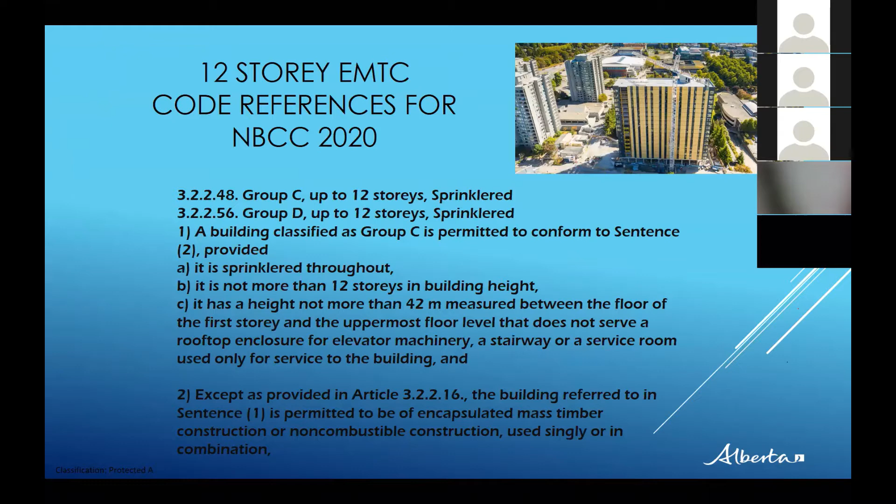These are the code provisions intended to be in the 2020 National Building Code of Canada: of course sprinklered, height not more than 42 meters, measured between the floor of the first story and the uppermost floor level, and it does not serve a rooftop enclosure for elevator machinery, stairway, or service room — only for servicing the building.

The building referred to is permitted to be of encapsulated mass timber construction or non-combustible construction, used singly or in combination. That would be the hybrid construction, where they typically do the podium or a number of floors at the base with non-combustible construction, and then go with encapsulated mass timber from there on.

Now, the current requirement is non-combustible construction — the degree of fire safety attained by the use of non-combustible materials for structural members and other building assemblies. Combustible construction means that type of construction that does not meet the requirement for non-combustible construction.

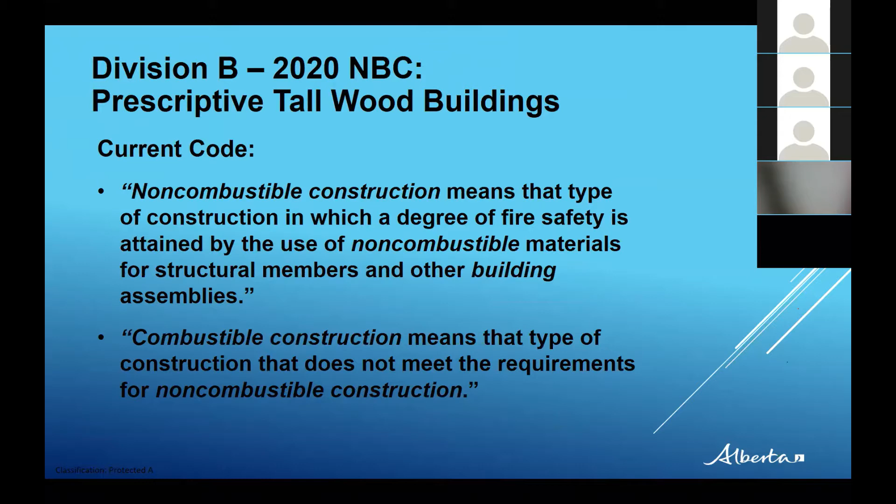Non-combustible construction and combustible construction, as defined terms, they're convenient, although not necessarily accurate categorized labels. Could just as easily say this type of construction is X, and the other type is everything that's not X. That's pretty broad, and it leaves room for other definitions or other types of construction now that there is more advanced technology to address that.

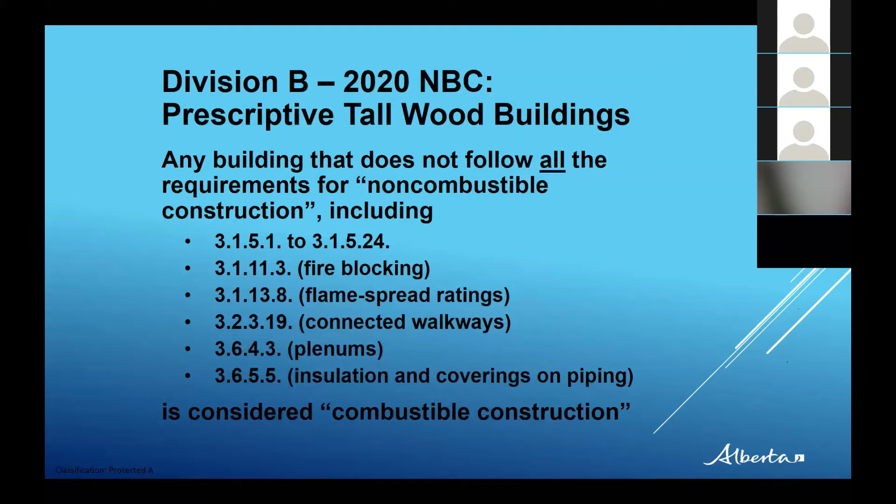Again, in the NBC, any building that does not follow all the requirements for non-combustible construction, including 3.1.5.1 to 3.1.5.24, which includes fire blocking, flame spread ratings, connected walkways, plenums, insulation, and coverings on piping, is considered combustible construction if it does not comply with any of those.

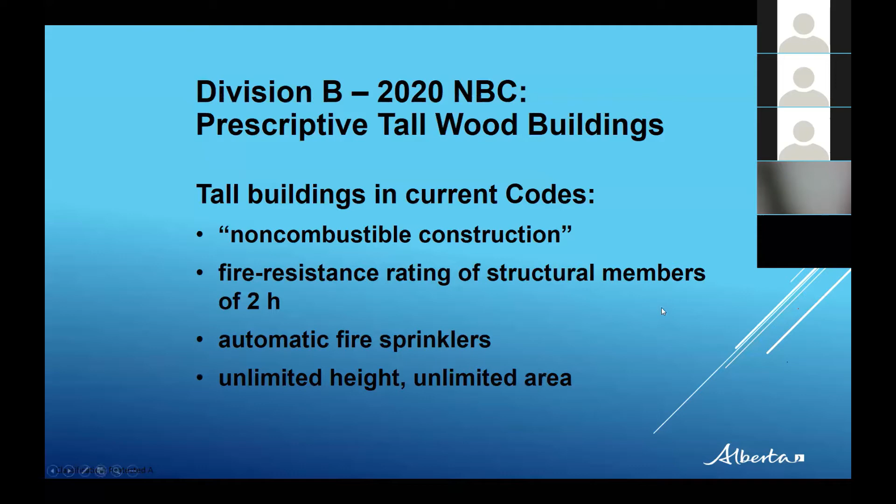Okay, tall buildings in current codes are required to be non-combustible construction. There would be a required fire resistance rating of structural members of 2 hours. They require automatic fire sprinklers under NFPA 13, and that's currently unlimited height and unlimited area. That's considered to provide an acceptable level of safety.

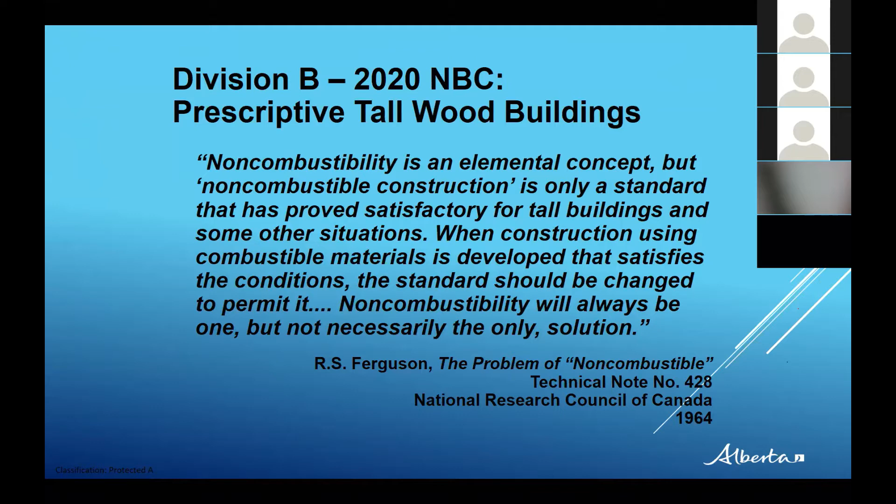However, for the 2020 NBC, under prescriptive tall wood buildings, non-combustibility is an elemental concept, but non-combustible construction is only a standard that has proved satisfactory for tall buildings and some other situations. When construction using combustible materials is developed that satisfies the conditions, the standard should be changed to permit it. Non-combustibility will always be one, but not necessarily the only solution.

And this is from the notes of Mr. Ferguson from the NRC, in the technical notes, and that was back in 1964. So it was recognized that maybe there's something else, but at the time that solution wasn't available, and this is where we are now.

Under tall wood buildings, the general premise was to develop a set of provisions that achieves the current level of fire safety when wood structural elements are substituted for structural elements of non-combustible material.

This again is where we come to the mass timber construction, with the concerns and issues brought up by the sub-council or sub-task groups that must be addressed to provide that approximately equivalent level of safety, or it's an alternative solution for us under the standards, but that is going to be in the 2020 National Building Code of Canada.

So again, non-combustible construction, then there's structural elements required to be of non-combustible materials replaced with wood elements. So that would be the mass timber elements, and then what additional requirements are needed to address the situation so that the acceptable level of safety is maintained in a building built with mass timber.

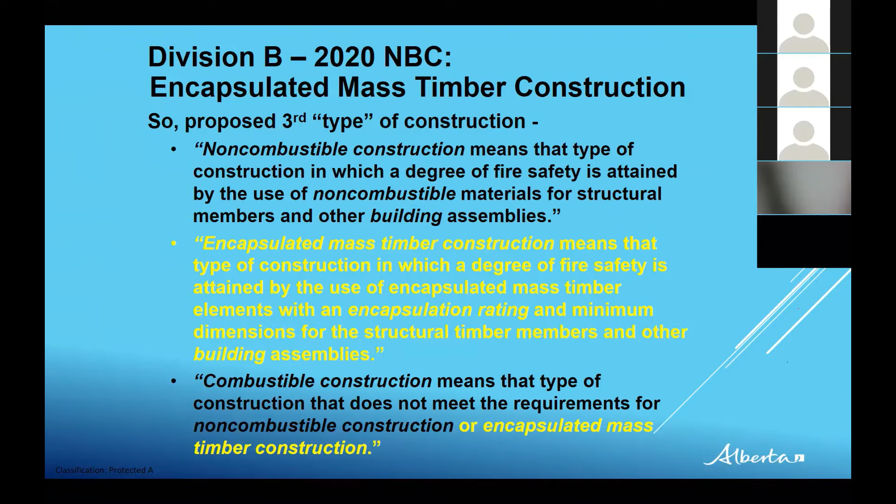Now, the third type of construction, encapsulated mass timber construction, means that type of construction in which a degree of fire safety is attained by the use of encapsulated mass timber elements with an encapsulation rating and minimum dimensions for structural timber members and other building assemblies.

So that revises the definition of combustible construction, meaning that type of construction that does not meet the requirements for non-combustible construction or encapsulated mass timber construction. So that is the third type, which we are working with, encapsulated mass timber construction. Typically, I'll refer to that as EMTC as I move along.

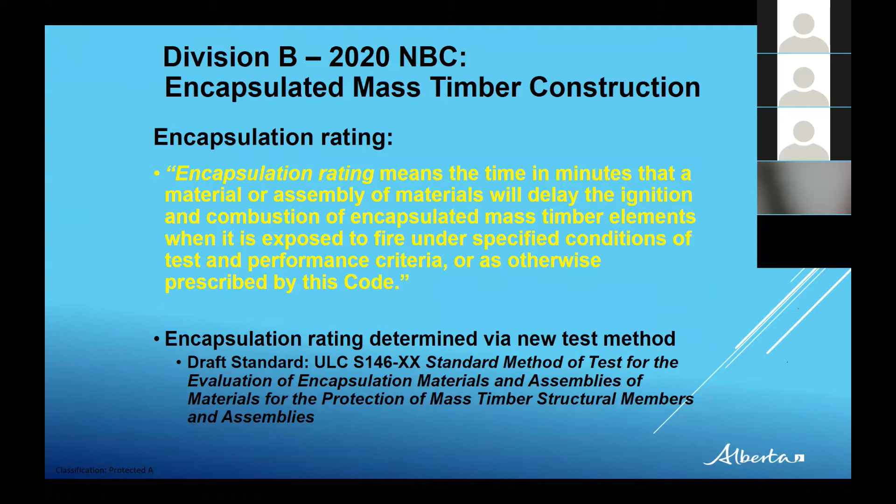And encapsulated mass timber construction has an encapsulation rating, and that's a new defined term as well. Encapsulation rating means the time in minutes that a material or assembly of materials will delay the ignition and combustion of encapsulated mass timber elements when it is exposed to fire under specified conditions of test and performance criteria, or as otherwise prescribed by this code.

An encapsulation rating is determined via the new test method of the draft standard ULC S146, standard method of test for the evaluation of encapsulation materials and assemblies of materials for the protection of mass timber structural members and assemblies. And this encapsulation rating, of course, would have to meet the minimum 2-hour standard as currently required for non-combustible construction.

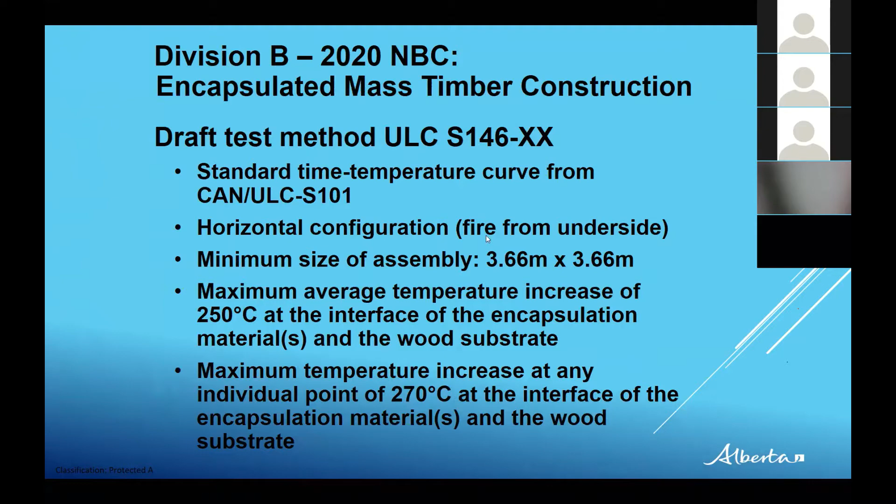The draft test method for EMTC uses the standard time temperature curve from CAN ULC S101, horizontal configuration, fire from underside, so that's tested from typically under the floor. Minimum size of assembly to be tested is 3.66 meters by 3.66 meters.

The maximum average temperature increase of 250 degrees C at the interface of the encapsulation materials and wood substrate. The maximum temperature increase at any individual point is 270 degrees C at the interface of the encapsulation materials and the wood substrate.

Now that is what was proposed and has already gone through, and is going to be in the National Building Code of Canada 2020. But initially it had been anticipated that the next edition of the Model National Codes would be available in 2020, typically in November or December of this year.

Codes Canada has announced that the publication date has been updated for the national model codes and has been extended. The next editions are anticipated to be available in December 2021, including the National Building Code of Canada, the National Fire Code, the National Energy Code for Buildings, and the National Plumbing Code of Canada. All anticipated to be available together in December 2021, which would avoid anything showing up in the middle of the construction season.

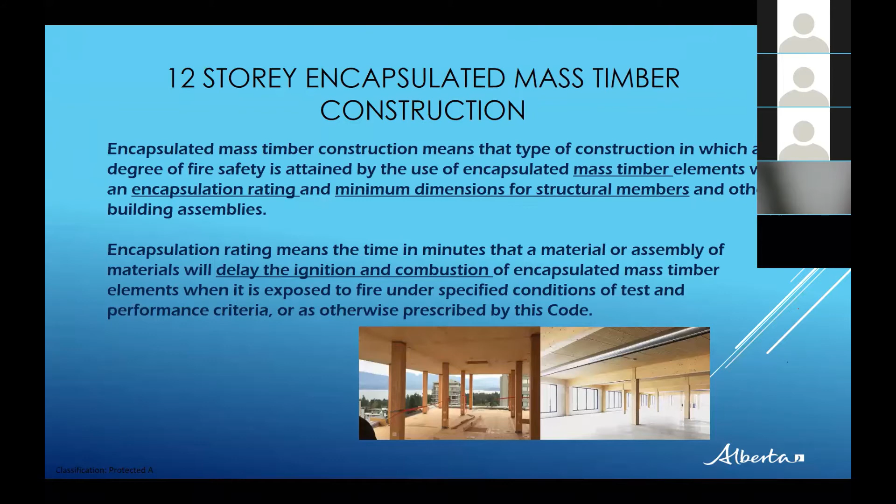As you can see from this slide, this is the exposed mass timber while it's under construction. In the second picture, there's still exposed mass timber at the ceiling levels, but they have the concrete flooring installed - concrete or gypcrete of 1.5 inch thickness - installed on top of the mass timber flooring. So that's partially encapsulated at this time, and that's how they're attaining the fire protection ratings.

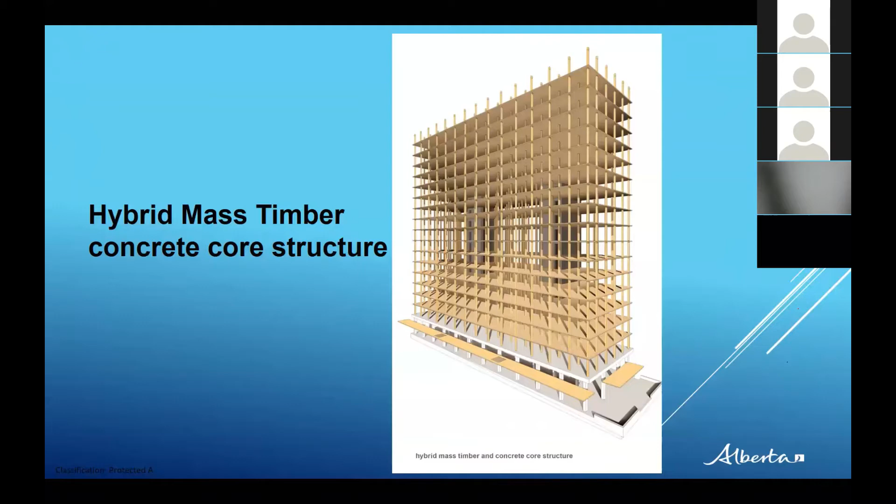Okay, the hybrid mass timber concrete core construction. As mentioned, this is the hybrid mass timber core from the 18-story UBC Tallwood House building, and they've built the podium, as you can see down here. That is a concrete podium, and if you look through here, the two cores are concrete cores that contain the elevator shafts and the exit stairwells for the building.

That is just showing the exposed mass timber. It would not be up like in this manner under construction.

Okay, and under the mass timber structure, they do have steel connectors that join all the floors together and the columns as well - that's where the floor assemblies connect into those structures. And the partial encapsulation - this is the CLT floor slabs here, and glulam columns and steel connectors.

Then during construction, they must do partial encapsulation. So that's where they would do the floor with the concrete on top, and just under here - you can barely see it - with one layer of drywall to do the partial encapsulation.

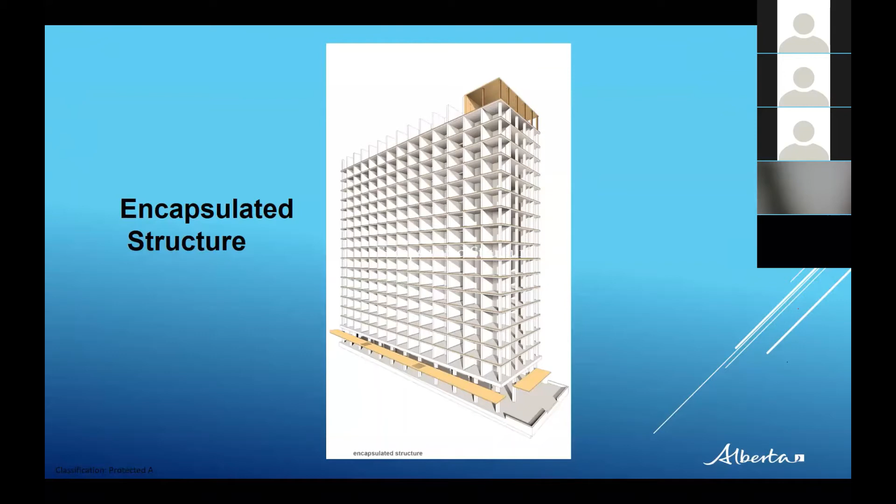So under this same Tallwood House drawing, they do show the completed structure as fully encapsulated, so you would see minimal exposed mass timber elements within the building. That was the other thought - was it fully exposed mass timber throughout the whole building? That was another concern initially brought forward to us, when at the time we identified that everything would be encapsulated.

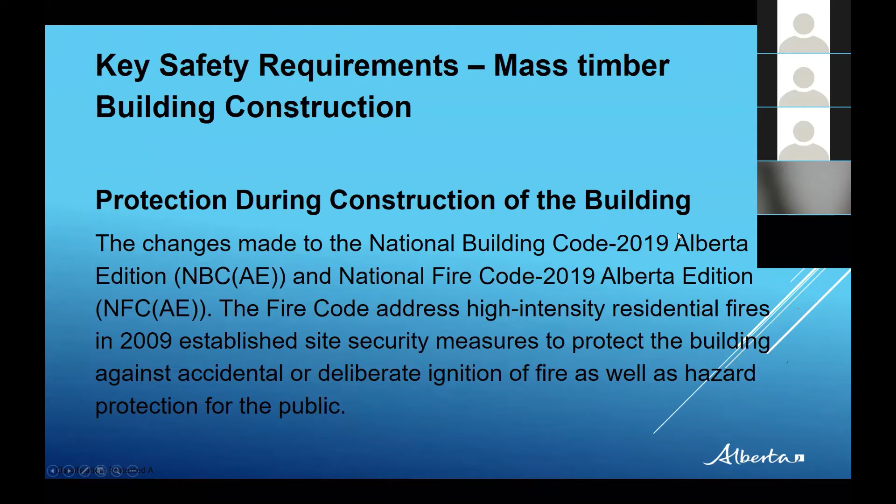Now, the key safety requirements for mass timber building construction. One of the big issues is protection during construction of the building, again brought forward to our attention by the fire services. The changes made to National Building Code 2019 Alberta Edition and the National Fire Code 2019 Alberta Edition - the fire code addressed high-intensity residential fires in 2009, established fire site security measures to protect the building against accidental or deliberate ignition of fire, as well as hazard protection to the public. This carries over into the 2019 editions of the fire code, and this criteria is highlighted within the STANDATA for EMTC.

The national standards for mass timber buildings of up to 12 stories maintain protection during construction of the building, and establish even better protection standards while the building is under construction. The building may only be occupied once fire safety features are fully enabled.

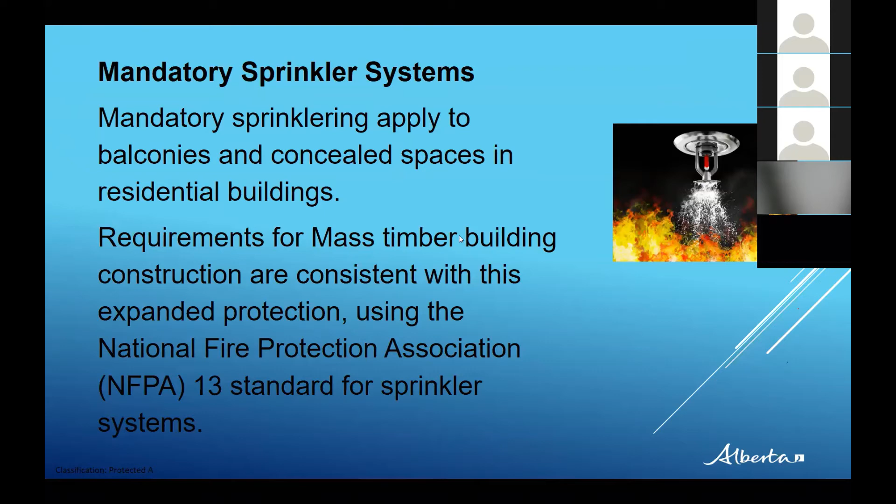Of course, there are mandatory sprinkler systems required, applying to balconies and concealed spaces in residential buildings. Requirements for mass timber building construction are consistent with this expanded protection, using the National Fire Protection Association, or NFPA 13 standard for sprinkler systems. It would not even relate to the NFPA 13R, which is only for buildings up to 4 stories, residential construction.

Of course, there's a fire rating of roof coverings to prevent fire growth and the spread of fire across the roof covering, which could lead to the spread of fire to occupied parts of the building. Class A roofing is required, and that's within the code, but it's specific as well to identify that that's required for the EMTC building.

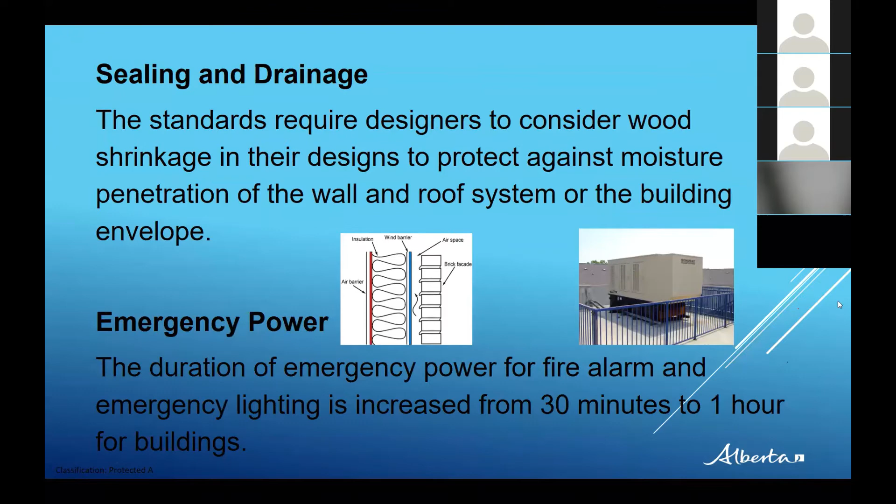The sealing and drainage - the standards require designers to consider wood shrinkage in their designs to protect against moisture penetration of the wall and roof system of the building envelope. This is inherent in wood construction - there is going to be a certain amount of shrinkage, and that has to be addressed in the design.

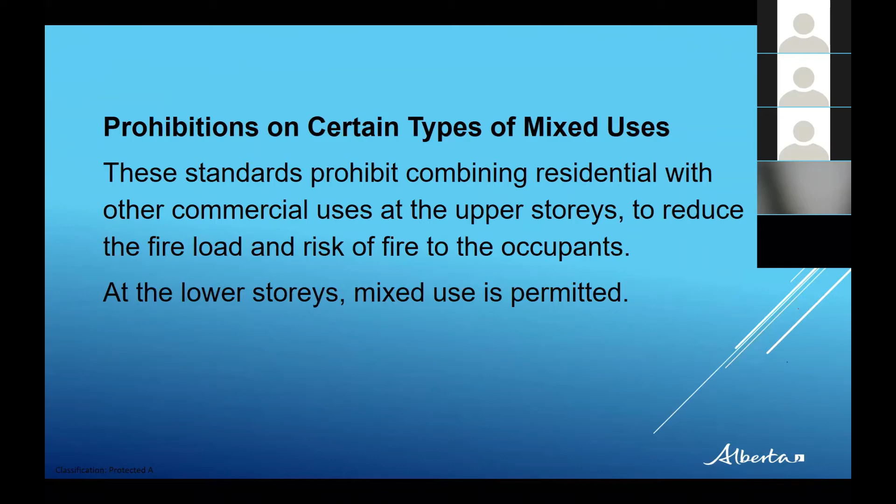Emergency power - duration of emergency power for fire alarm and emergency lighting is increased from 30 minutes, which is typical, to 1 hour for buildings under EMTC. That is over and above what's typically required in a typical non-combustible construction or another type of 12-story building.

Prohibitions of certain types of mixed uses. These standards prohibit combining residential with other commercial uses at the upper stories to reduce the fire load and risk of fire to occupants. At the lower stories, mixed use is permitted.

The strength of modern mass timber versus concrete - despite being 5 times lighter than concrete, cross-laminated timber, or CLT, has a comparable strength-per-weight ratio to concrete, as a multi-layer wooden panel spanning in 2 directions. Each layer is placed crosswise to the adjacent layers to increase its stability and strength. Buildings using mass timber carry the same strength as concrete.

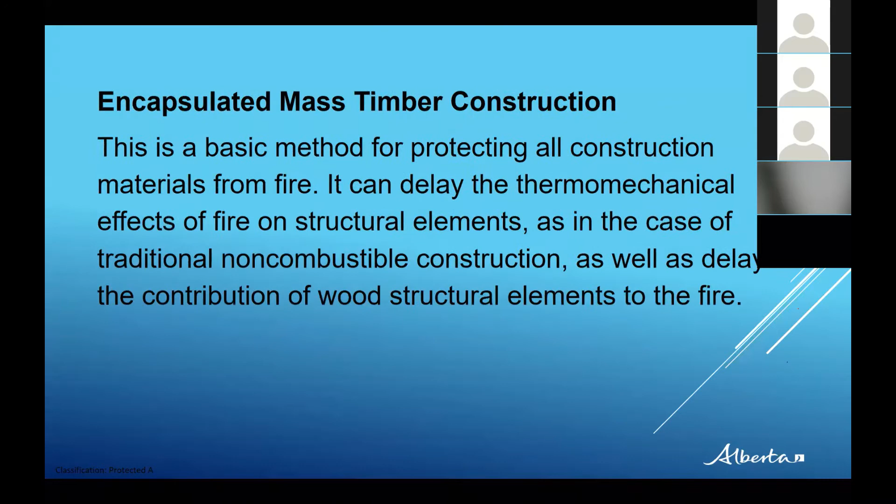This strength also enables mass timber buildings to commonly outperform other systems in terms of cost and life safety in earthquake zones. As you can see, the timber strands, or the mass timber, have one layer going in one direction, and then the next layer crosses in the other direction. That's how they're attaining their strength, using certified or acceptable adhesives.

For EMTC, this is a basic method for protecting all construction materials from fire. It can delay the thermomechanical effects of fire on structural elements, as in the case of traditional non-combustible construction, as well as delay the contribution of wood structural elements to the fire. That again is the encapsulation rating.

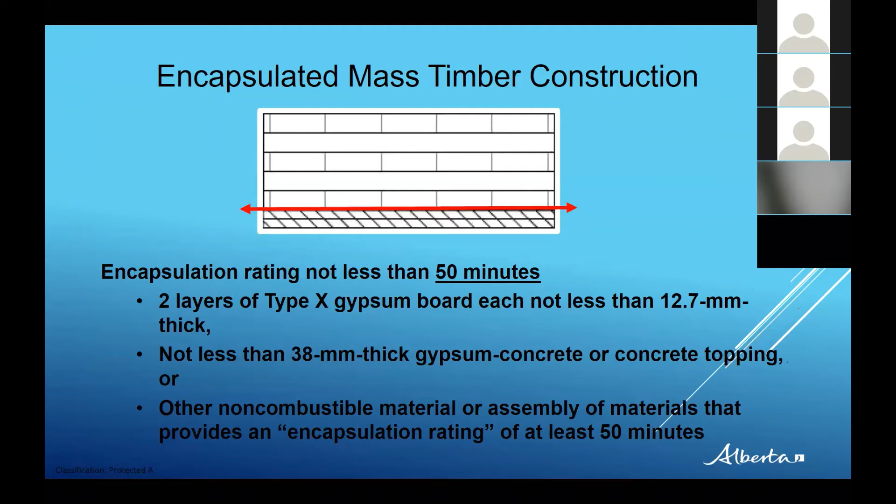For the encapsulation rating, not less than 50 minutes over and above the rating of the mass timber itself - 2 layers of type X gypsum board, each not less than 12.7 millimeters thick; not less than 38 millimeter thick gypsum concrete or concrete topping; or other non-combustible assembly materials that provide an encapsulation rating of at least 50 minutes. That is the additional requirement over and above the structural member itself.

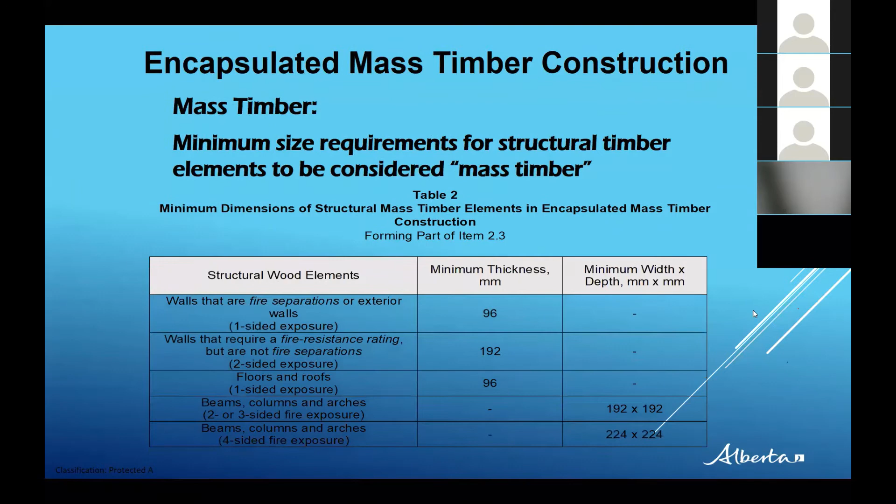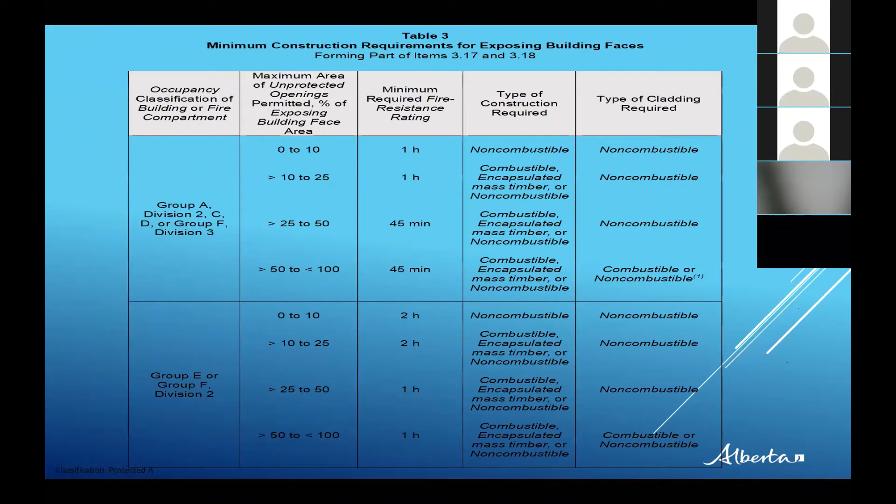There's a table for the minimum size requirements for structural timber elements to be considered mass timber, included within the standard data. These have been developed to provide assurance that the timber elements will exhibit the fire performance characteristics of mass timber rather than lightweight small dimensional wood elements. This means that after charring, the timber elements will still be thermally thick for the required fire resistance rating.

Table 2, or table 3, includes the minimum construction requirements for exposing building face, included in the standard data.

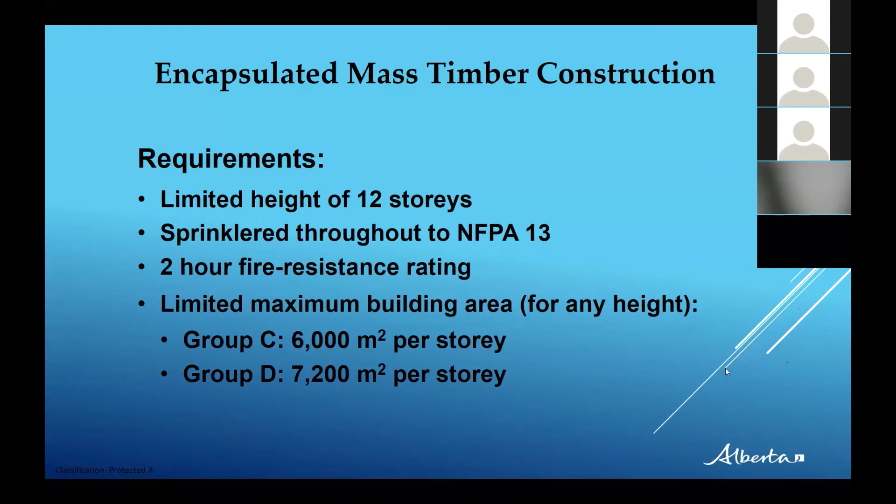EMTC construction is limited to a height of 12 stories, sprinklered throughout to NFPA 13, with a minimum 2-hour fire resistance rating, and limited maximum building area for any height. Group C is 6,000 square meters per story, and Group D is 7,200 square meters per story.

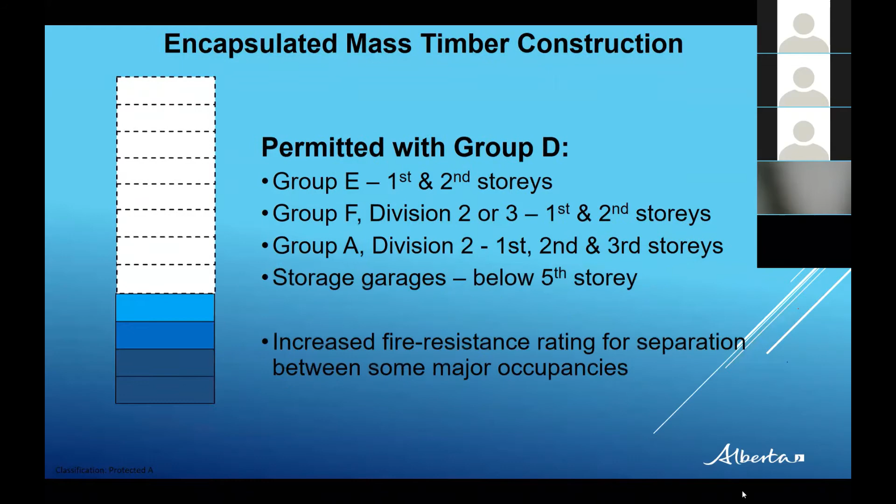So it's permitted in all stories for Group C or Group D, up to 12 stories. Group E can be permitted on the first and second stories. Group A Division 2 on the first, second, and third stories. Storage garage can be built below the 5th story. There's increased fire resistance rating required for separation between some major occupancies.

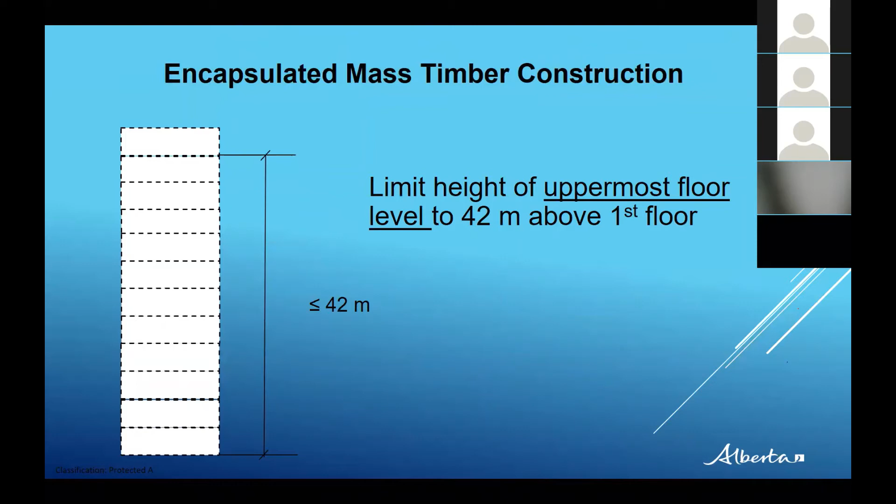Permitted with Group D, Group E on first and second stories again. Group F Division 2 or 3 on the first and second stories. Group A Division 2 on first, second, and third stories. Again, storage garages below the 5th story, and increased fire resistance rating for separation between some major occupancies.

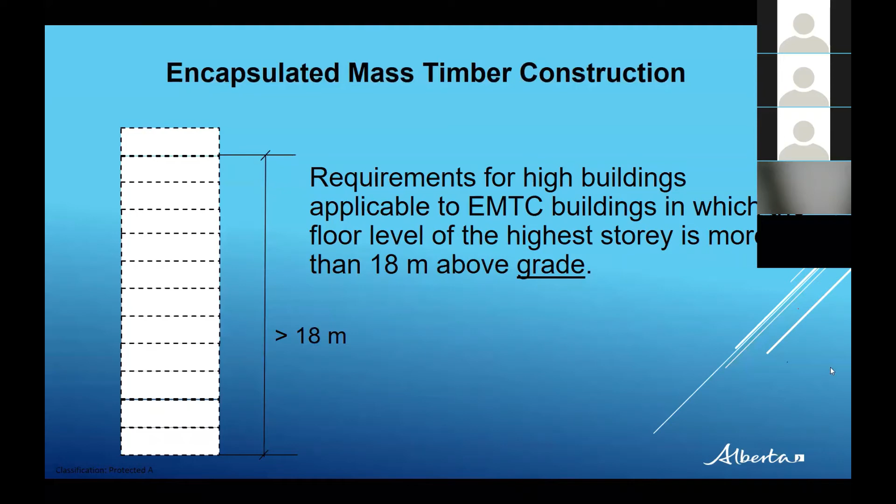Encapsulated mass timber construction limits the height of the uppermost floor level to 42 meters above the first floor level—so that's the first floor to the floor of the uppermost story being 42 meters or less. As indicated, the STANDATA has to be used in conjunction with the building code, and the requirements for high buildings apply to EMTC buildings where the floor level of the highest story is more than 18 meters above grade. Once that's in effect, high building criteria come into play.

What are the additional mass timber requirements? The materials permitted shall conform to subsection 3.1.5 for these EMTC requirements: combustible roofing materials, combustible window sashes and frames, exterior cladding, combustible components in exterior walls. This indicates the limits on those elements, including nailing elements, combustible flooring elements, combustible stairs, combustible interior finishes, combustible elements in partitions, and concealed spaces. So it's not saying you can use combustible stairs anywhere, but it does provide for using them in certain locations.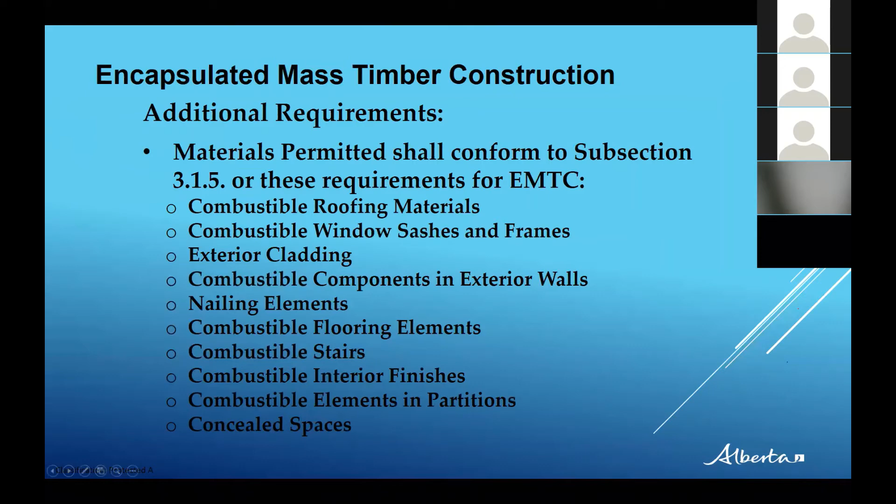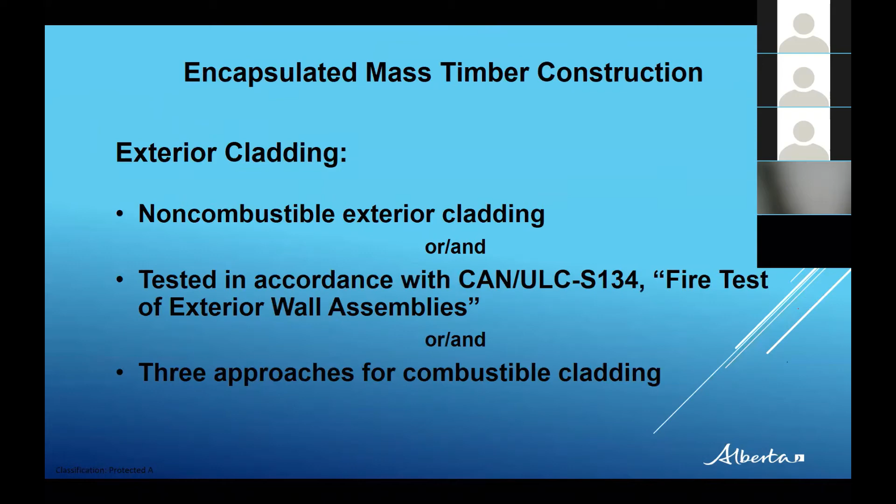The floor system for a raised platform, for example in item 2.9 of the STANDATA, is permitted to include combustible subfloor and combustible finished flooring, on top of the encapsulated mass timber flooring. Wood stairs are permitted in a suite but need to conform to items 2.2 to 2.7 and 2.9 to 2.12 of the STANDATA—so combustible stairs within a suite, for those with two-story suites in a high-rise, I guess.

Exterior cladding must be non-combustible and/or tested in accordance with CAN ULC S134 fire test of exterior wall assemblies, and there are three approaches for permitted combustible cladding. Approach 1 represents not more than 10% of each story, not contiguous over more than 4 stories, not more than 1.2 meters in width, separated from other portions of the same story by 1.2 meters, separated from adjacent stories by 2.4 meters, and a flame spread rating of not more than 75.

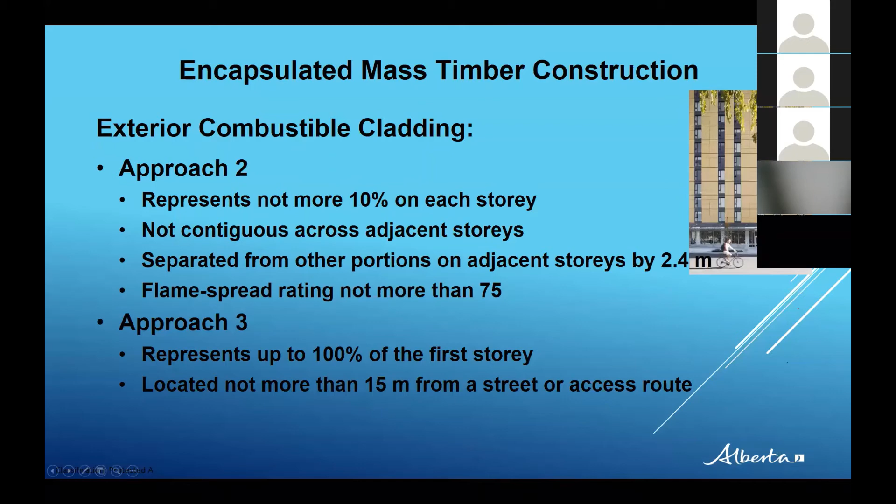Exterior combustible cladding approach 2 represents not more than 10% on each story—excuse me, I think I provided a picture that may indicate more than that. That is a UBC building, but the requirement is a flame spread rating not more than 75, and under that approach there are special requirements, so don't mind that picture I included. Again, it's separated from other portions of adjacent stories by 2.4 meters, not contiguous across adjacent stories.

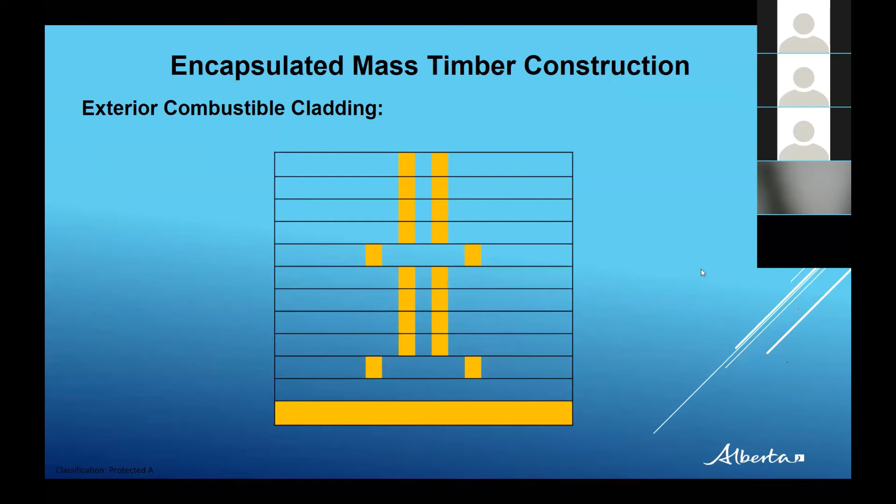Approach 3 represents up to 100% of the first story, not located more than 15 meters from a street or access route. So that may look something like this for exterior combustible cladding—for a typical 12-story EMTC, you would end up with not that much combustible cladding. Another scenario could look like this for exterior combustible cladding, though like I said, that picture I had was a little misleading, as it's not for a 12-story EMTC.

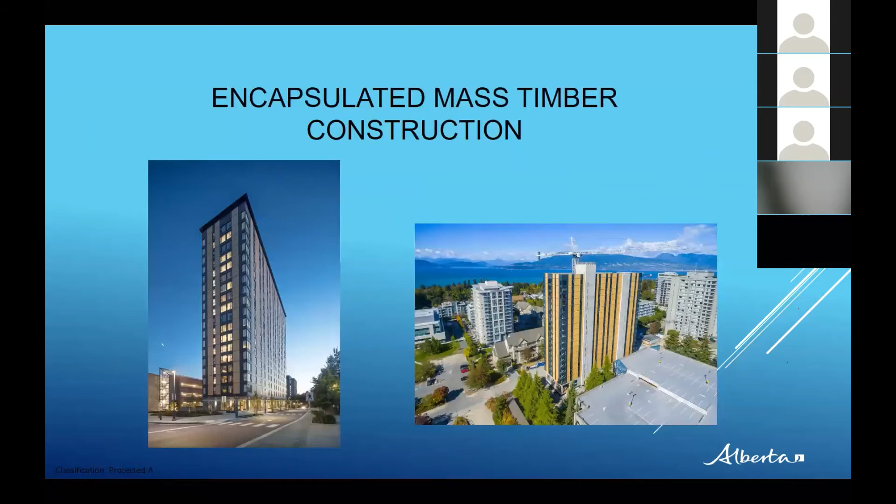Encapsulated mass timber construction. Again, what I am using is the 18-story tall wood building that I had permission to use these pictures. I didn't want to get copyright protection issues with using someone else's pictures, so these ones I had permission to use. So that would be the building again at UBC, University of British Columbia, and this is part of the process they were going through for the encapsulated mass timber construction.

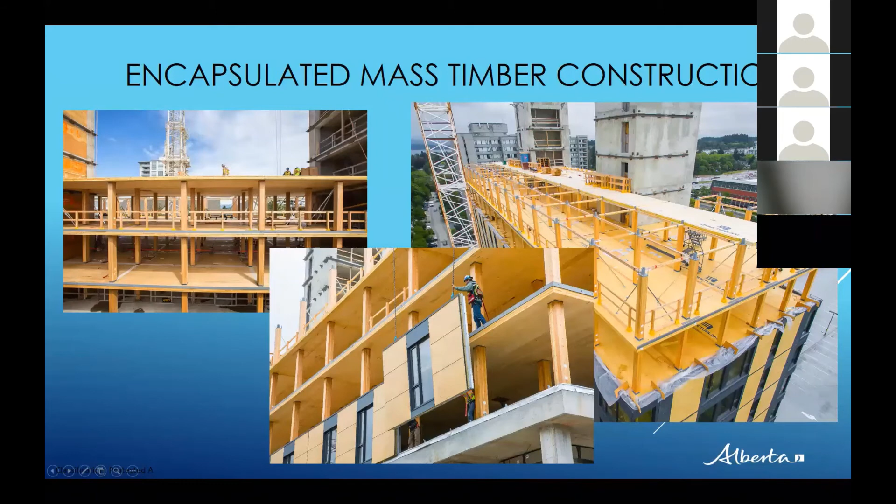As you can see, they're doing the wall panels prefabricated offsite. This initially, that's the podium that they're working on. You can see these steel wraps around here, that is forming the basis for the encapsulated flooring, with the concrete or gypsum going on top of the wood structure. Again, there's a side picture here, but as you can see, the panels are going in. These are full-size panels, all prefabricated off-site.

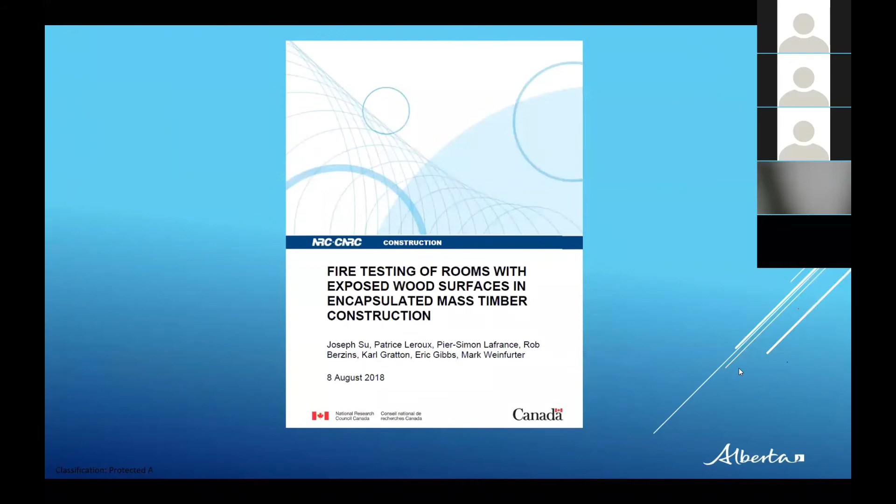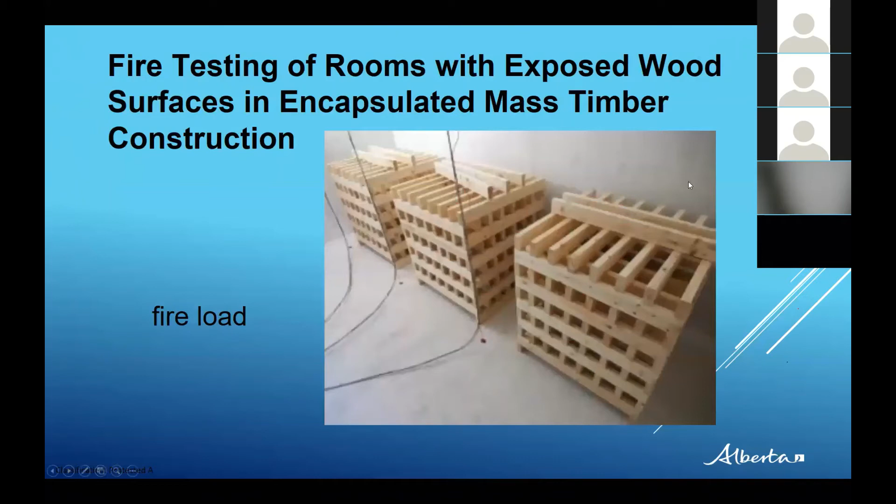They did some fire tests of rooms with exposed wood surfaces in encapsulated mass timber construction. That was done by the National Research Council. Their fire test room setup had a big furnace and hood, and basically they took raw exposed mass timber to do their fire testing. The fire tests included wood cribbing for the fire load, and the fire load is the average residential fire load density of 550 megajoules per square meter. So that's still a pretty good fire load.

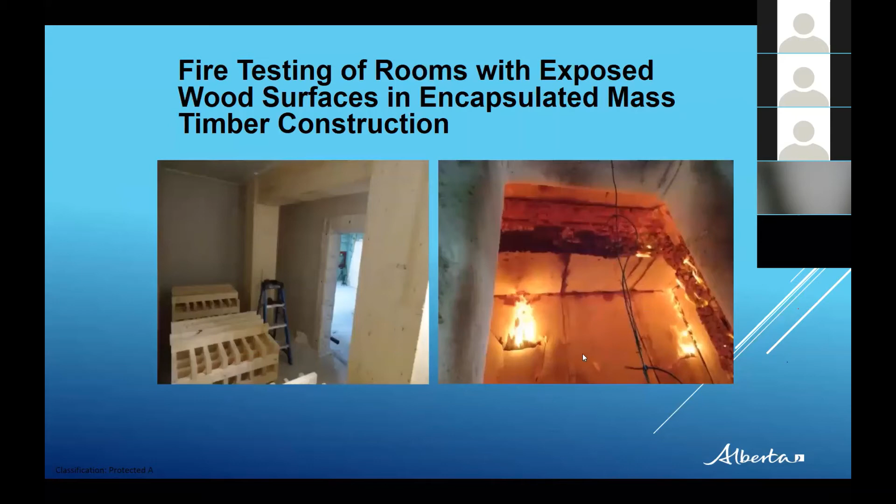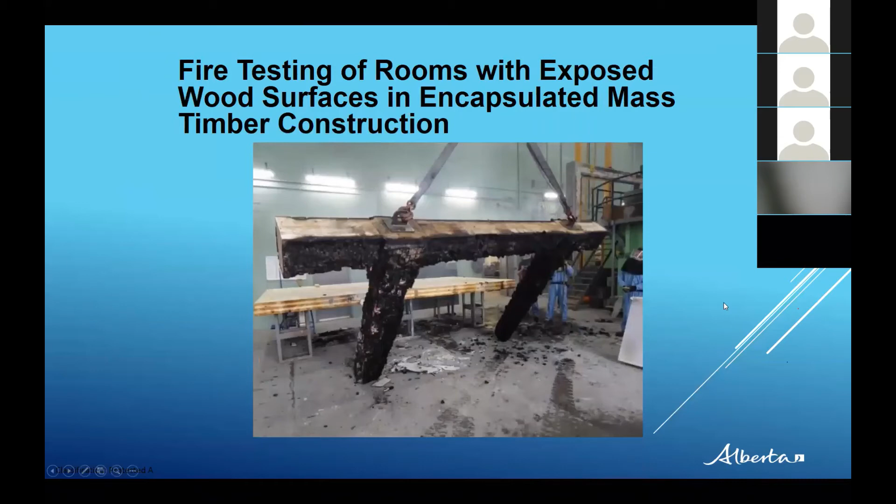And then they did the fire test and set it on fire. Basically you could see the exposed mass timber, and then they did the criteria where they encapsulated a portion of the ceiling assembly and the wall assembly. So there's some more fire tests, and basically here they show the columns, exposed columns and beam, and then the rest of the room was covered with a layer of gypsum. Again, they set that on fire to see what happens.

And here's the exposed column and beam after it was burnt up. As you can see from here on one side, there's still some structural integrity within the exposed beam. And then from the column, it's charred, but there's still a certain amount of mass left within the column. Again, here's the end view - you can see the exposed beam, the structural integrity is there. And that charring, once it's charred, is providing a protective layer around the mass timber.

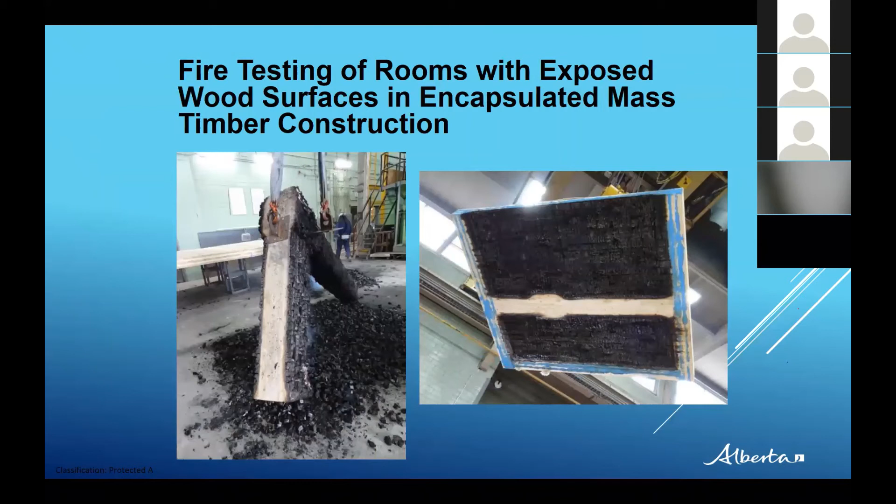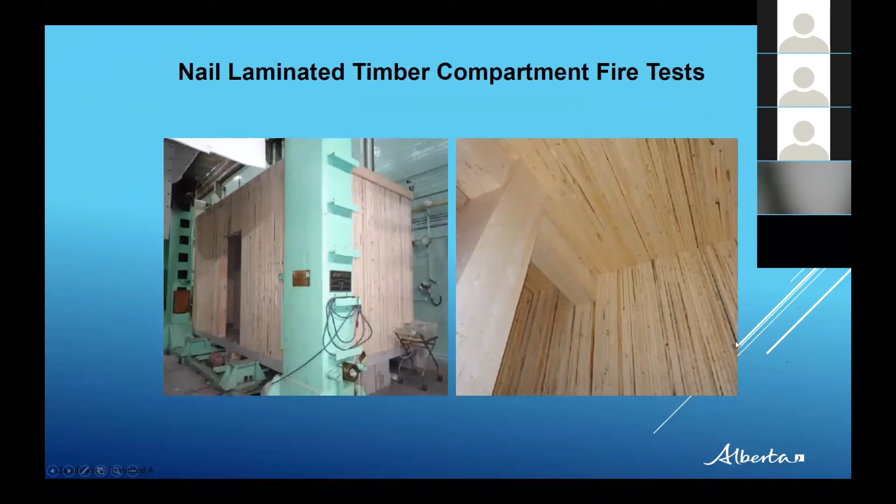And here you can see where the drywall is burnt off, and here's where that beam was holding up. So that still has some charring here, and the structural integrity is still there for their design. Just some more fire tests, again showing the charring that forms - it becomes a sacrificial layer of the wood. Once it's charred, then it maintains the integrity after that initial char. And just some more pictures of fire testing - they did burn those rooms up pretty good.

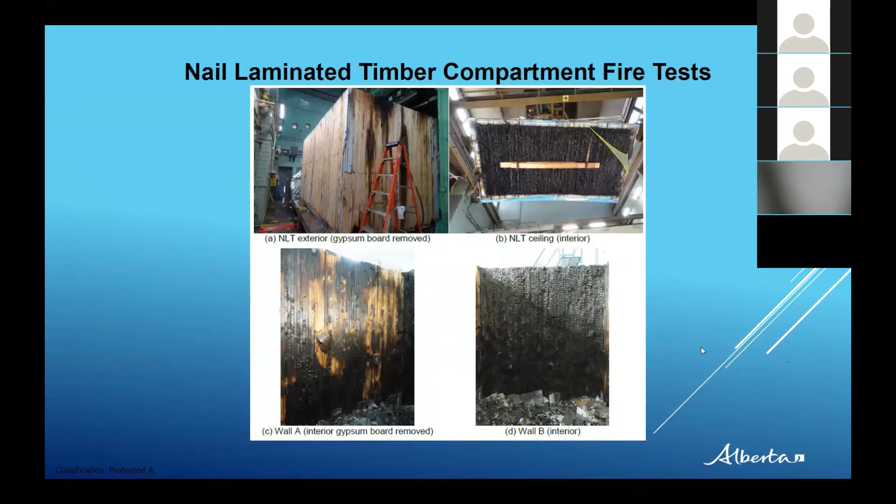We'll go through this pretty quick. Nail laminated compartment fire tests - they did the same thing with nail laminated testing. So this is not CLT, it's nailed and laminated pieces of lumber. Again, they built a compartment and burnt it up, with the same average fire load. And initial tests, they're showing the tests of the nail laminated system. Initial tests did not work out so good, but they had different adhesives that they used later on.

And this is a test after 2 hours of burning. So just to show you that it does char, but the initial mass timber holds up in place.

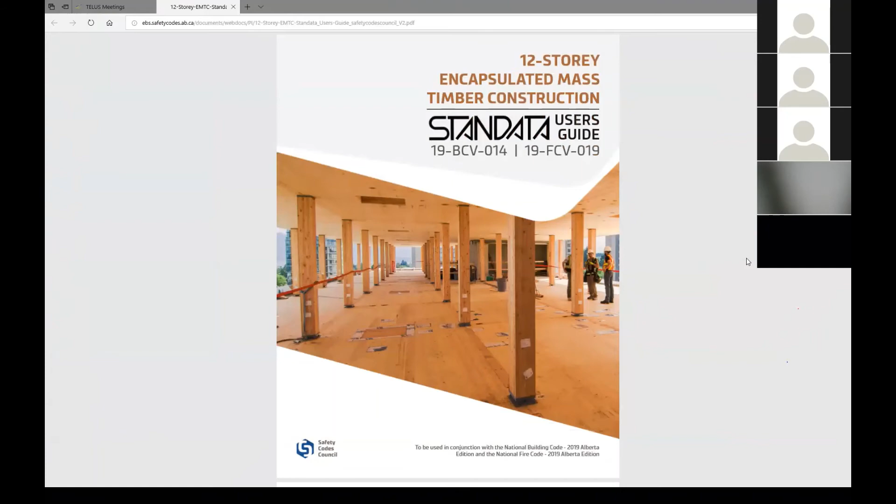Now the EMTC standata user's guide - that was just developed to assist, basically providing the applicable code references from the standata have been included in this user's guide. And I did forget to include that basically within that standata user's guide, the portions of the standata with the code references are all hyperlinked. So we could open this up, I believe.

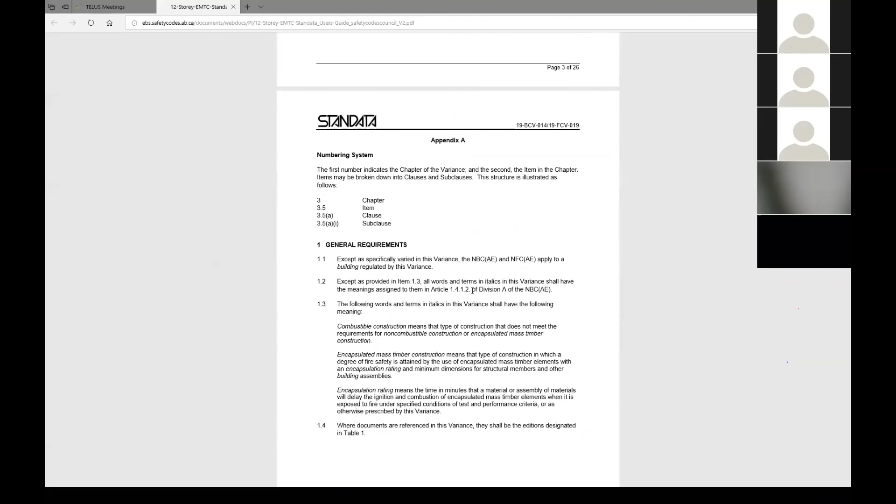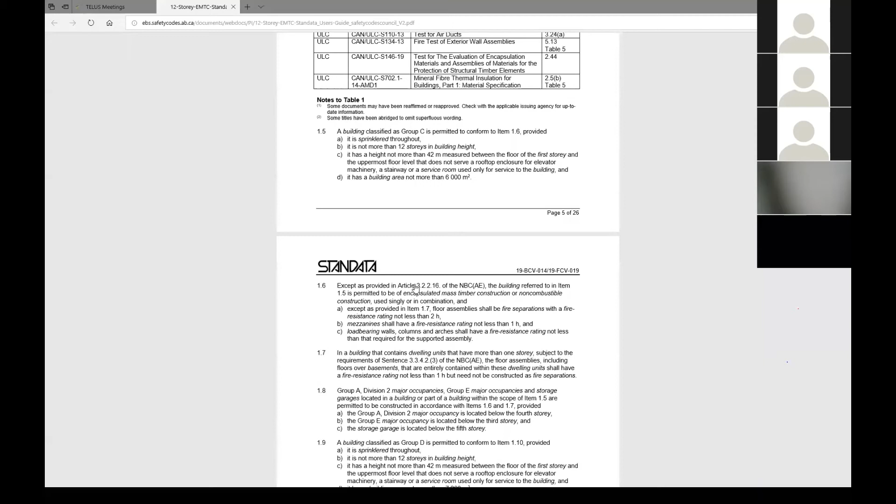Can you see the Standata on there, Katie? Yep. Okay, here's the user's guide that was hyperlinked in, so it's freely available. It's on the Safety Codes Council site, and basically you go to the Standata, and then it talks about the appendix, which is the requirements for a 12-story.

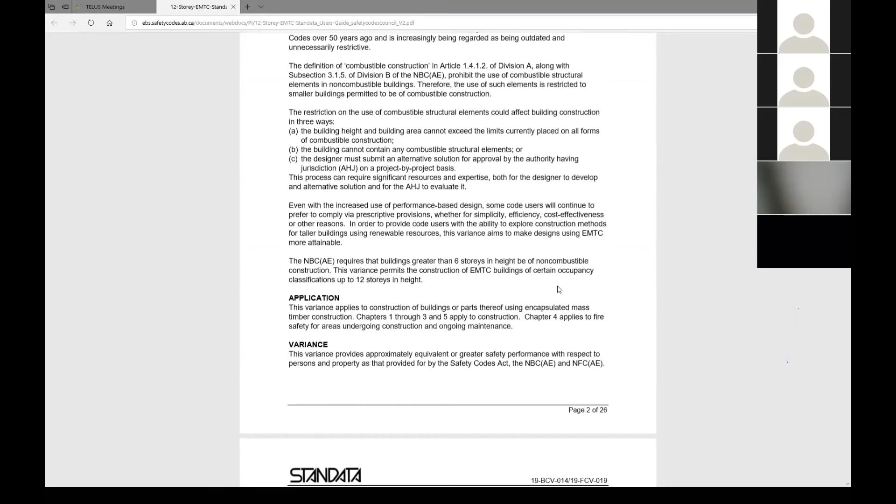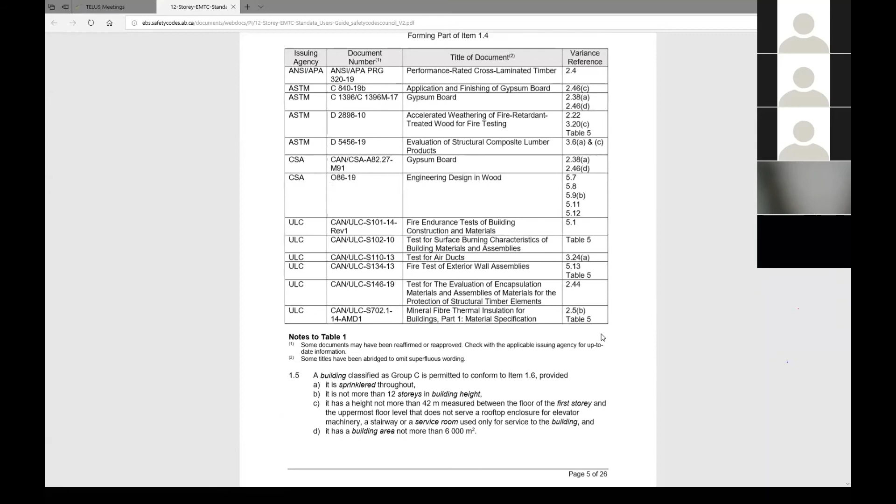Once we get past this first section with the tables, it does make reference to a code article here. Within that, you click that and it'll go to 3.2.2.16 — that was the code article, I believe. So it will always go through, and all those code articles have been included within this user's guide, with copyright permission provided by the National Research Council, because it was not just a couple of pages or lines.

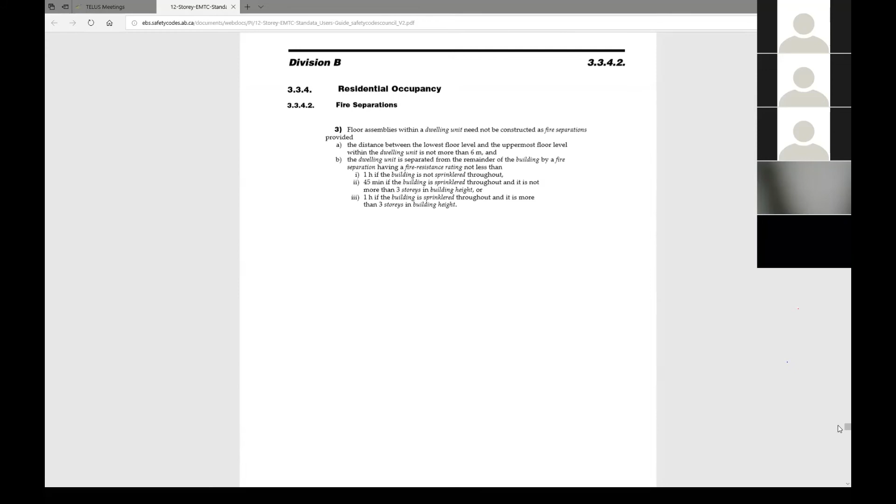So all of this, if you go through it, they're all hyperlinked within that document. Again, you still use it in conjunction with the code, but I try to package it so that the real applicable sections will send you to, or all be included within, this user's guide. Once you download it with your Adobe Acrobat, you can navigate it a lot better than I can right now on the website.

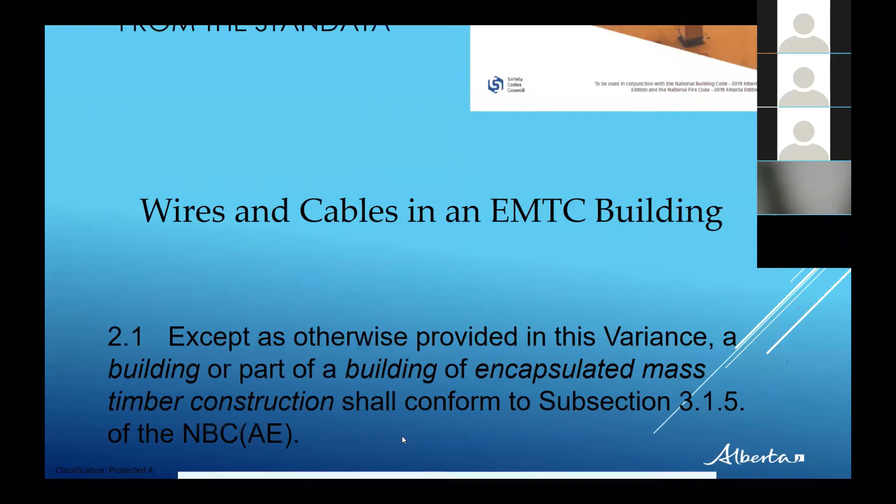Here's requirements for 33423, that's included in there. As you go through that, all those are hyperlinked. There's a couple at the very start that aren't, but the rest of them are hyperlinked. If anybody finds something that's not working, let me know and I can review it. I did have it reviewed by other stakeholders outside of municipal affairs.

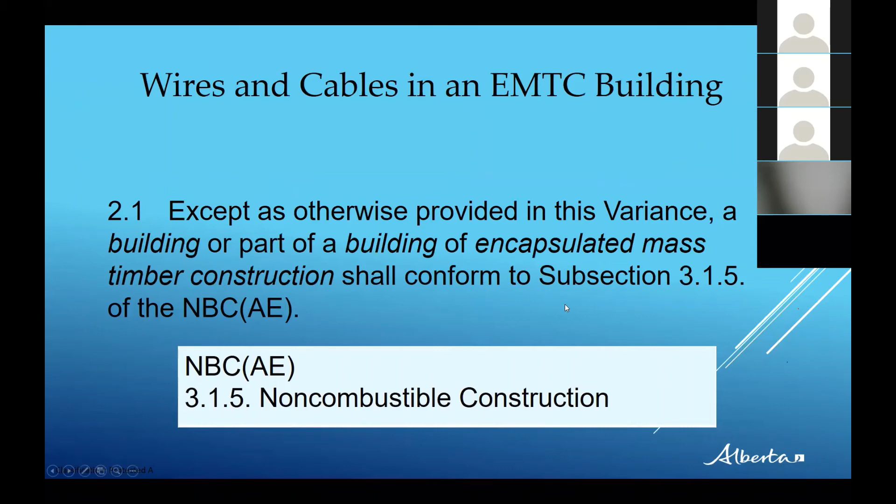So hopefully that's helpful. Back to the user's guide. One of the items that was brought up with the electrical discipline is wires and cables.

It's for them — it's not non-combustible, so can they use regular Loomex? No, because the building, except as otherwise provided in this variance, building or part of a building of encapsulated mass timber construction shall conform to subsection 3.1.5 of the NBC-AE, which is a subsection for non-combustible construction.

So you go to 3.1.5.21, wires and cables. The wires and cables are required to be FT4 — well, I guess that'll be according to the electrical guys, we'll have to look at that, but they cannot use regular Loomex. This provides the same ratings and requirements as a non-combustible construction building.

Some mass timber surfaces can be exposed within the building. There's a table for that. I'll go through probably another 5 minutes, I think.

Then we come down to fire safety. That references the National Fire Code 2019 Alberta edition. It talks about when a building is already completed, any damage or removed encapsulation material shall be repaired — no different than saying fire rated walls that have damage, or fire separations that have damage, have to be repaired. That's the same continuing requirement, just identifying the encapsulation ratings for the various structural members within an EMTC building.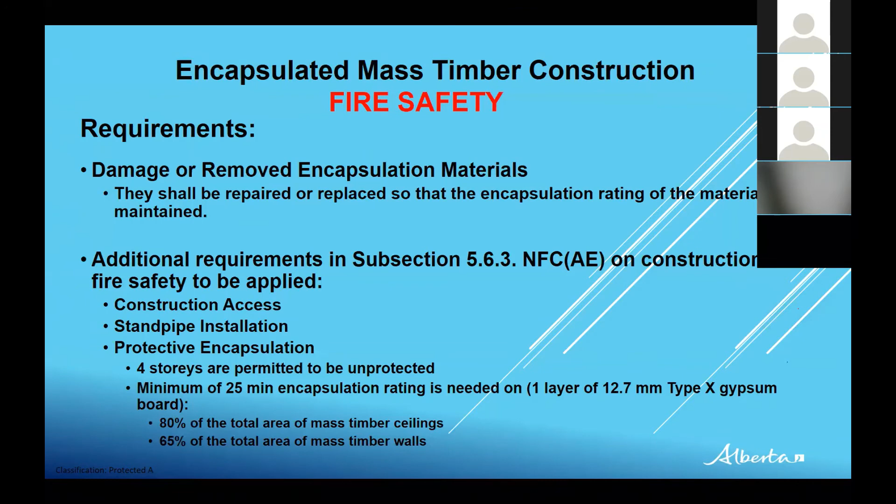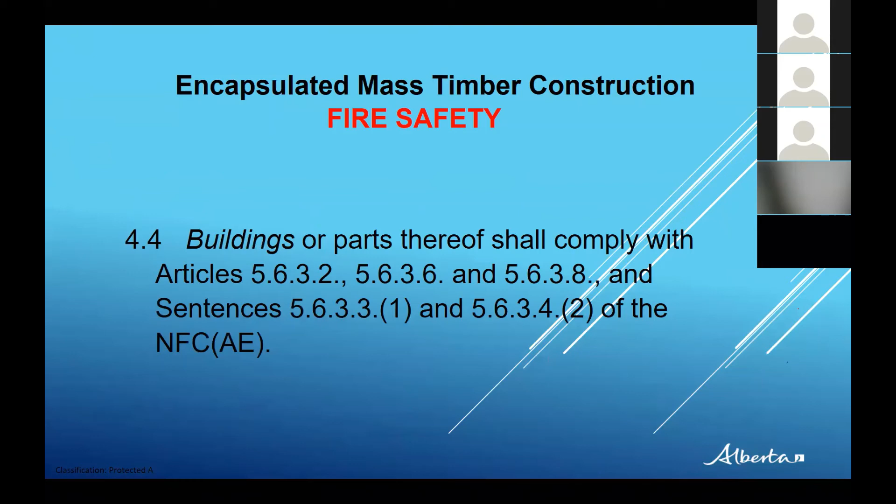Additional fire requirements on the construction site include construction access, standpipe installation, and protective encapsulation. Only 4 stories are permitted to be unprotected during construction, so the encapsulation has to go up with the building. Typically there's the 4 stories they're working on, and they're just preparing the 4th floor to be encapsulated.

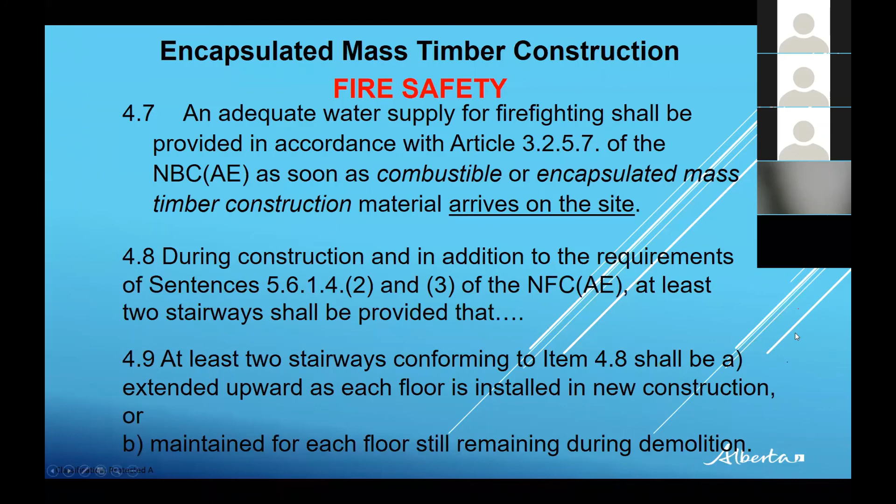Of course, adequate water supply must be on site as soon as combustible or encapsulated mass timber construction arrives on the site. That basically means you can't store materials there until you have all your firefighting supply water in place.

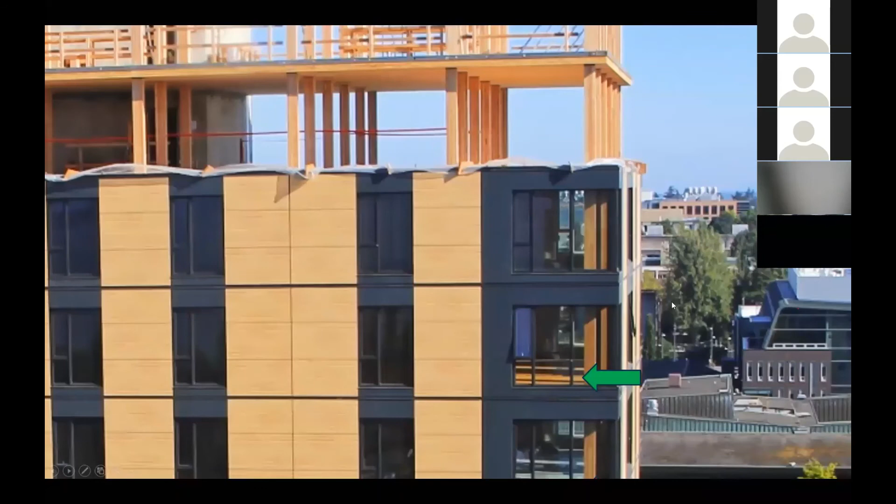Of course, the additional requirement is that at least 2 stairwells shall be provided — typically only 1 is asked for, but 2 stairwells must be provided here. At least 2 stairways conforming to item 4.8 shall be extended upward as each floor is installed in new construction, and maintained for each floor still remaining during demolition, should there be a point when one of these buildings is being demolished.

Again, not more than the 4 uppermost contiguous stories are permitted to be unprotected, as required by item 4.17, during construction. It indicates what material is required for that rating during construction. Let's see if we can see it here.

Sorry, it didn't come out too good. If you could see the green arrow, this is 4 floors here that's unprotected, and that floor is still the wood mass timber flooring.

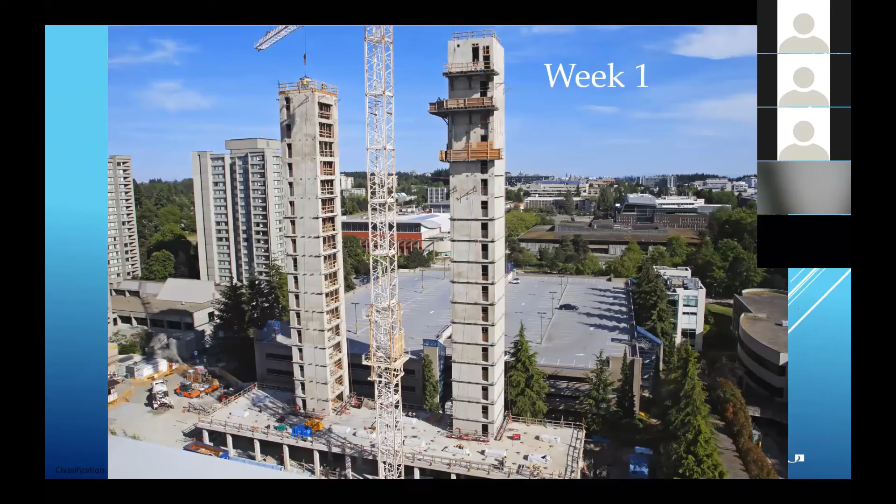Sorry again. And there should be an arrow right here. You can just see the red, but if you could see within this floor space, the concrete flooring has been installed.

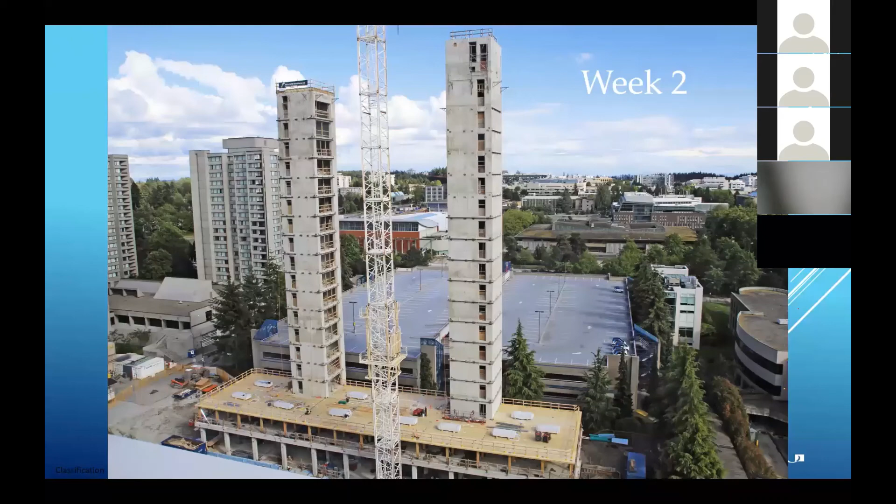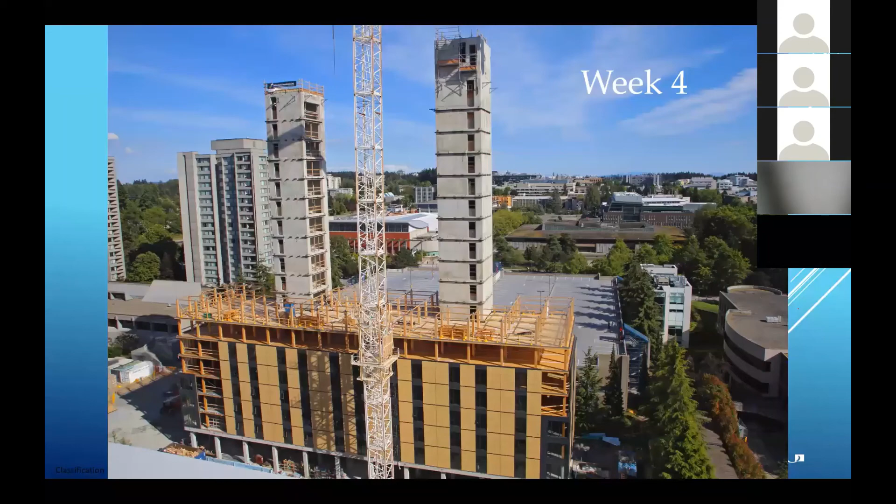Okay, and here's the 18-story Brock Commons Tallwood House time lapse. There's the podium and the concrete cores that have been put in place, the 2 stairwells, and that's required as well. They didn't build that in 1 week, but this is week 1.

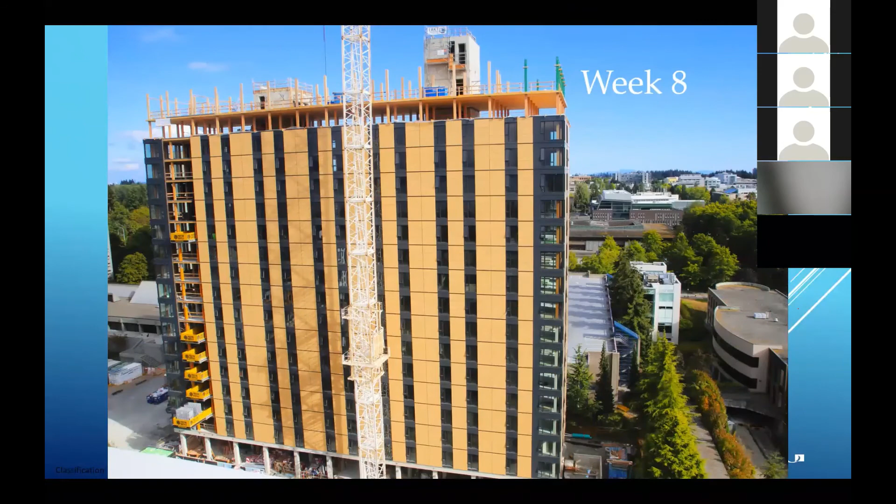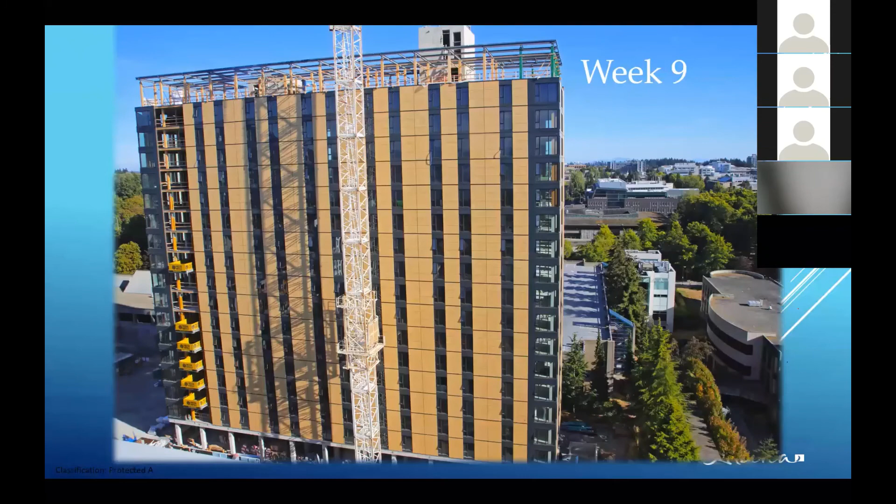Week 5, week 6, week 7, week 8, they're just getting ready to cap off with the roof sheathing. Week 9, that's the steel frame at the top for the metal roof sheeting. So 9 weeks, that's the 18-story building there.

The Brock Commons photos were courtesy of the architects, Acton Ostry Architects Inc., who were the lead on that project. I had the fire test photos and additional content provided by the Canadian Wood Council, compliments of Mark Allam, the engineer there, from his presentation.

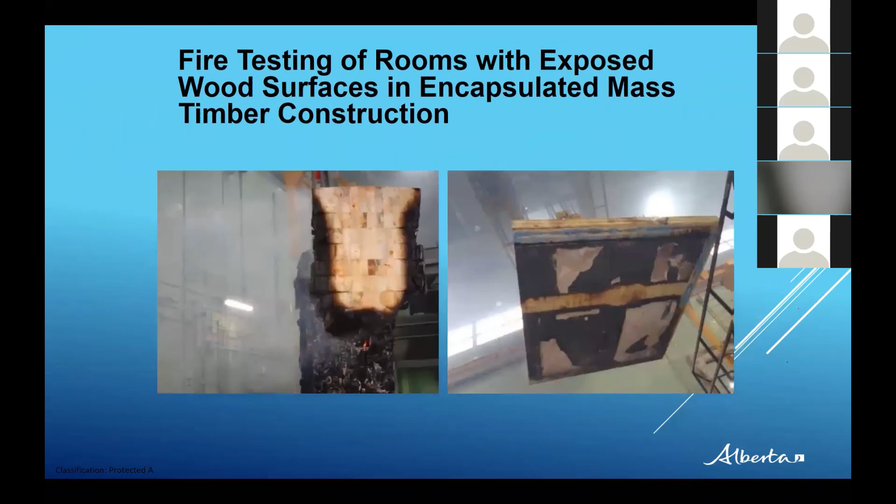Am I still live here? You are. Oh, just, yeah, slide 72. Let me just get it up if there. Trying to, who put all these slides in?

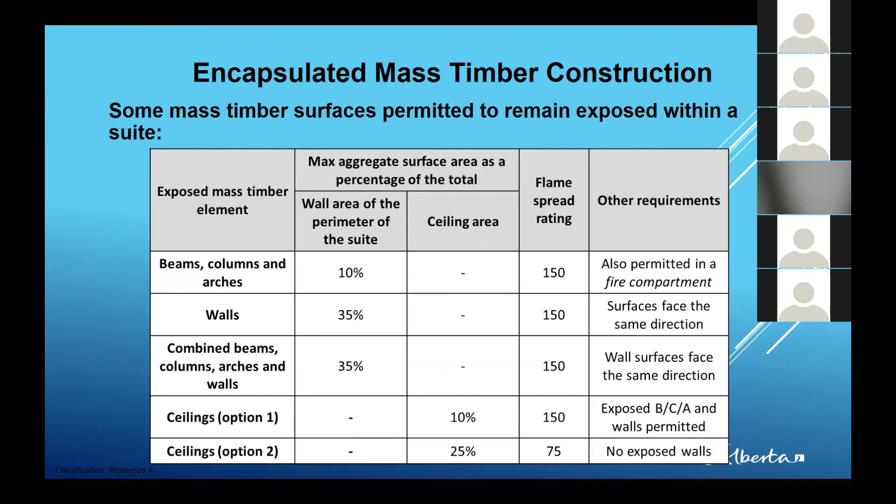I don't know. Okay, slide 72 has the table for exposed interior surfaces. Okay, it is, okay, slide 71, some mass timber surfaces permitted to remain exposed within a suite. So you do have a percentage and the flame spread rating, and that is the areas they can work with. Okay, so that is slide 71, or page 71, of the slideshow.